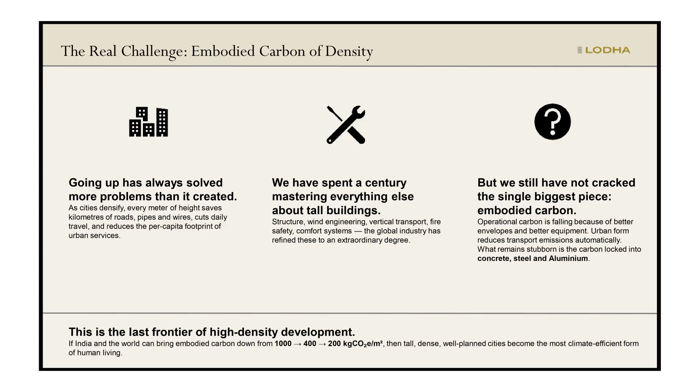Having talked about concrete, it's actually a very big impact area in embodied carbon. What has happened is that we know urbanization, density, and going taller will solve a lot of problems, and we now know how to go tall. We are even building 1-kilometer tall buildings in the world. So going tall and becoming energy efficient is not so much of a problem as much as reducing the embodied carbon, the carbon that is in the materials.

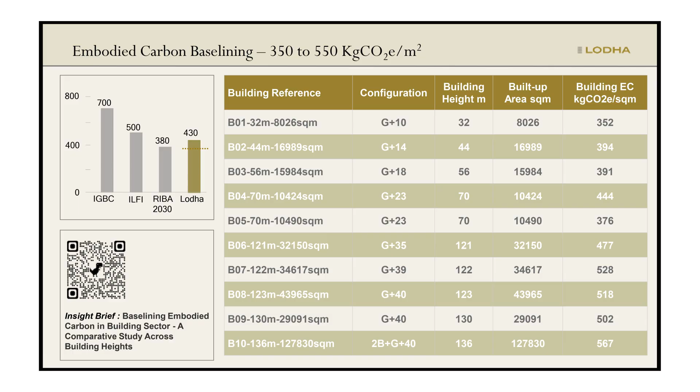The baseline in India is close to 1,000 kg per square meter, and we need to find a way to significantly bring that down. As an organization, we are working at a benchmark close to 400, and we now know that by operating certain levers, we can bring this down to even 200.

We recently published a study of close to 10 buildings, ranging from 10 stories, 15, 20, 25, 30, all that we have been building, including composite buildings, showcasing the embodied carbon that the buildings have. We have also listed down our assumptions where the EPDs or the embodied carbon coefficients are not readily available.

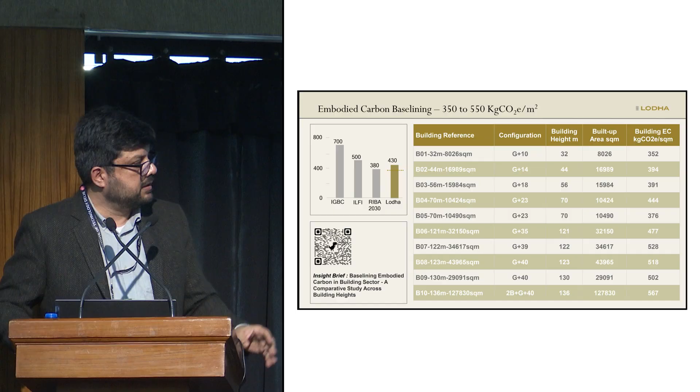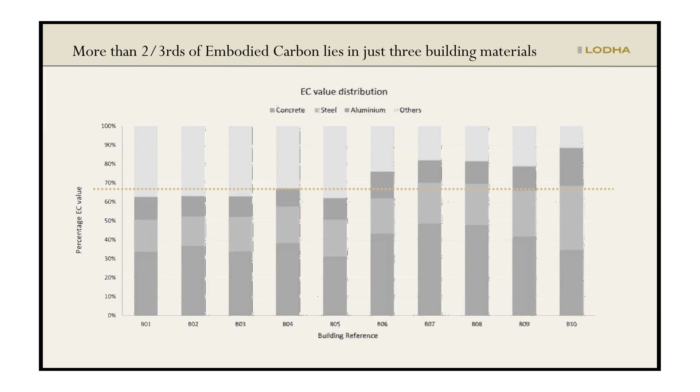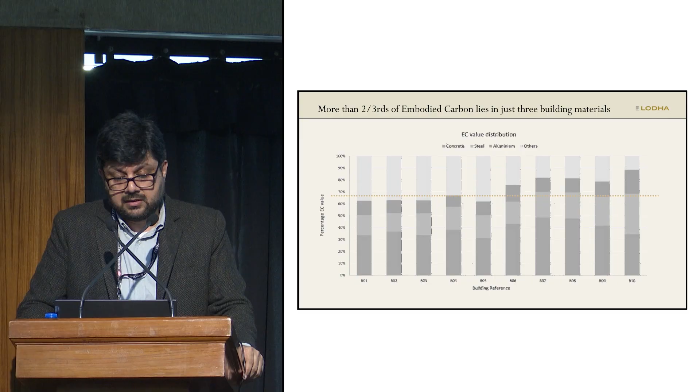So the idea is, we have already come down from a 1,000 baseline to 400, and how do we come down further? We know that most of the embodied carbon lies in just three materials, and if through design we can do something with these three materials, we can bring this down significantly. Two-thirds of embodied carbon is just in steel, concrete and aluminum. So if somehow we are able to attack the problem, we can sort of solve it.

And the problem is very much like this burger. It's a fat burger. Now how to make it more healthy? Sometimes what we end up doing is just get a better bun and a better patty. That's not going to solve it. That's exactly when we only talk about concrete mixes - let's try to do something with the mix and the whole problem will get solved. It won't. We'll have to have a paradigm shift where we maybe use the same materials and convert this whole thing into a salad bowl which has much lesser calories. So that's the approach we have taken.

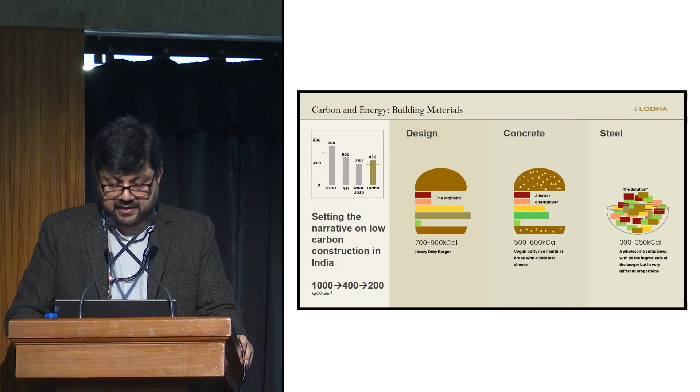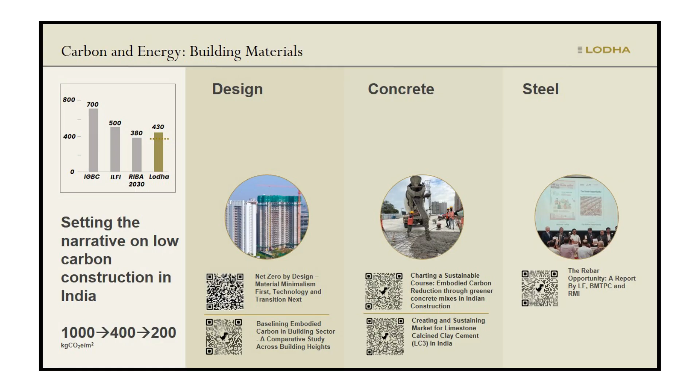We are working significantly on the aspects of design to bring down the embodied carbon. We recently wrote something on material minimalism where we have listed down the levers we are utilizing to lower the material intensities in a building. Most of our buildings are of regular geometries, so the loads directly get transferred to the foundations. We, at all costs, avoid basements, avoid transfer structures, avoid cantilevers. All these things add up to reducing the embodied carbon in a building.

I think that the graph you saw on the previous page, most of the wins are basically from design, because design is what you do today and you get the benefit today itself. And these baselining studies are also part of that exercise.

Next is concrete. By concrete, it's not only LC3, it's basically low carbon concrete. So any concrete mix that can bring down the embodied carbon significantly is what solves the problem. Currently the clinker factors, which are really very high in the concrete we use, we have to target them and push it to a level that is at least whatever is feasible at this moment, something we should achieve across our projects.

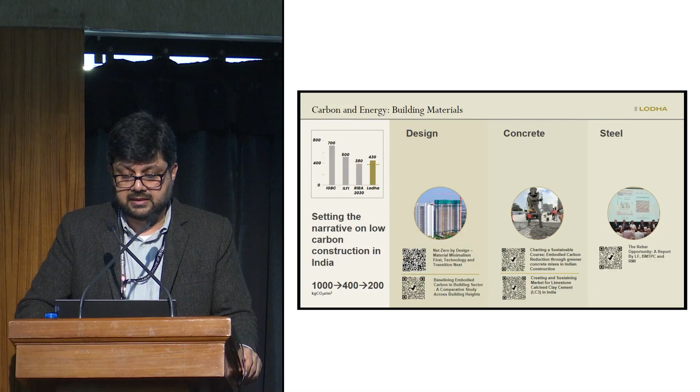We are working also on steel and aluminum, but I won't go into the details right now. We feel that if we are able to get the clinker factor down, and if we are able to get the embodied carbon emission of steel and aluminum also down to these numbers, and continue to do an efficient design, we will probably be able to bring down the embodied carbon significantly, to the tune of 200 kg per square meter for tall buildings.

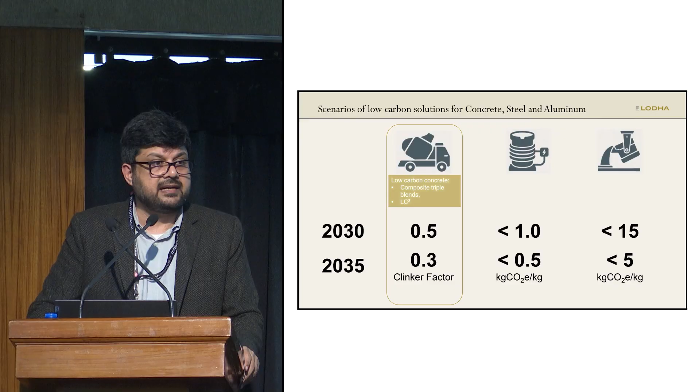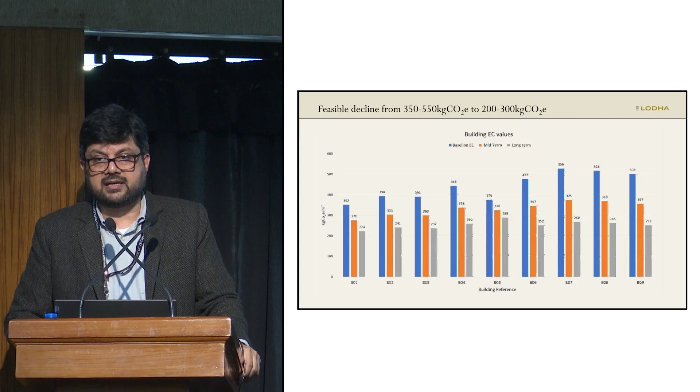So we are doing all these experiments and trials, basically leading up to these targets. This is out of a model where we see that across those 9 buildings, the embodied carbon can actually come down to 200 if those numbers are achieved.

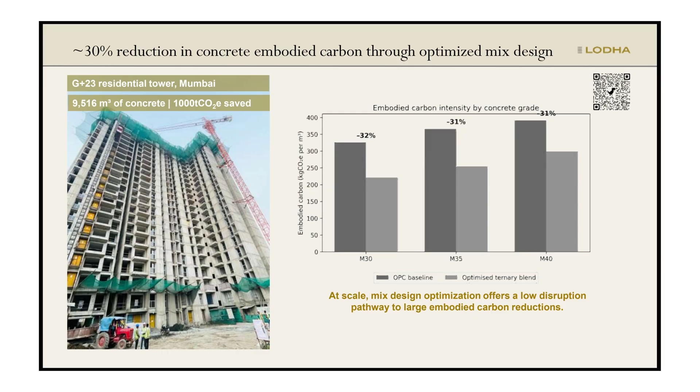I'll end by showing you one example. So we did a building with GGBS fly ash composite low carbon cement, which was with 50% cement, and it actually could bring down the embodied carbon significantly, close to 30%.

This option, while it may not be applicable for the entire country - plus whatever we are doing with LC3, where maybe GGBS will not be available - we need to just somehow cut the use of OPC and use these SCMs to the extent that we can.

Despite the fact that those mixes were working, I think LC3 will also be subjected to this sort of challenge - that while we have achieved those mixes, developing confidence on those mixes and using them at scale will be a challenge we will have to overcome.

We have already put it on a project in a road. I think we'll have to do it on some short structures, some in foundations, and then possibly some top floors in a building, and then ultimately an overall building. This is a multi-year journey.

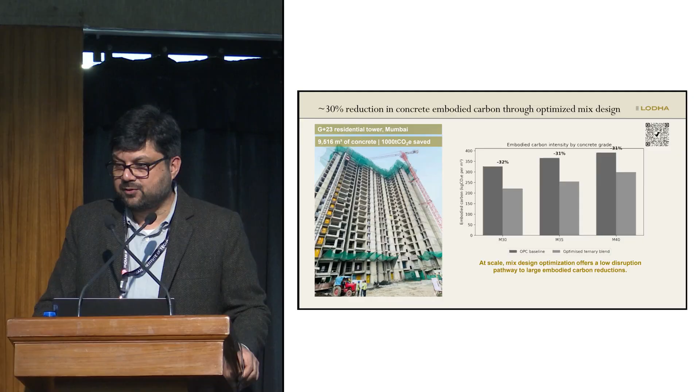So while I was patient today on the flight, you have been patient for so long, more than a decade. What we have been doing is a very little thing, and we will always be there, not only for LC3, but any other solution you would want us to try in our living lab and at Palava. We'll be very happy to do that. Thank you.